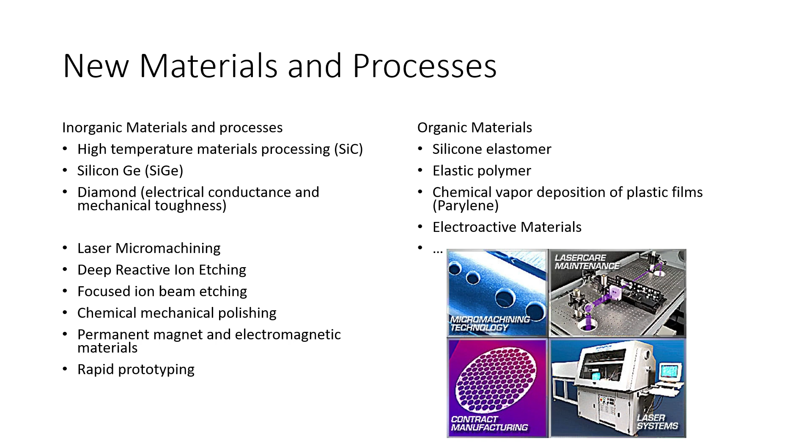We can use nanofabrication processes to make very fine nanostructures, very sharp tips, three-dimensional stacked lattices, or 3D stacked metallic structures.

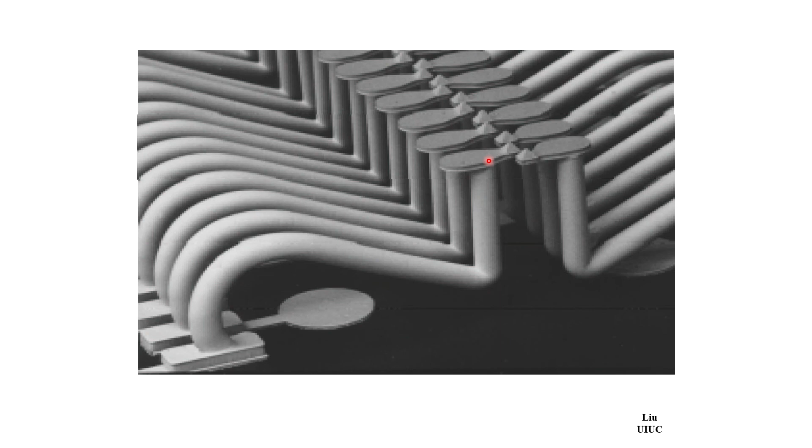A company called FormFactor invented a process using metal wires formed by wire bonding wires. And these have tips made by inverted molding out of bulk micromachined cavities. And this is later bonded to metal bonding pads to form these 3D arrays of springs that can be used to test the wafers after the fabrication, but before they're diced. So this is called the ATE probes, automatic testing equipment, ATE market.

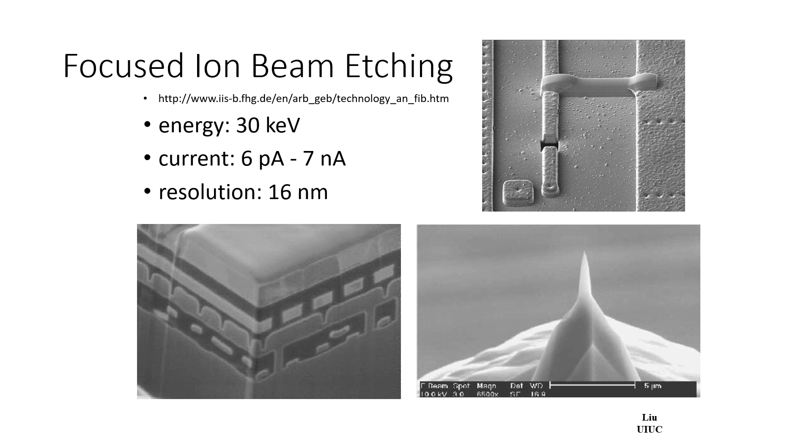Focus ion beam etching is another type of process where it's like ion beam formed in scanning electron microscope. You can use this to carve out cross-section structures or break structures such as metal wires, or use growths to form very sharp needles out of carbon conductive materials. The focus ion beam etching can be used to also etch sideways. For example, in this case, you can form capacitors that can measure the displacement of a proof mass that are suspended by two beams.

Now, one of the things that's very impressive about MEMS is that people keep on inventing new impossible processes that no one thought was possible. One such magic process is called DRIE, deep reactive ion etching. The invention of DRIE by Bosch made a name. People typically call it by the nickname Bosch process. This is credited to two engineers at Bosch in 1996. They invented a method where you can etch very deep structures with high aspect ratio.

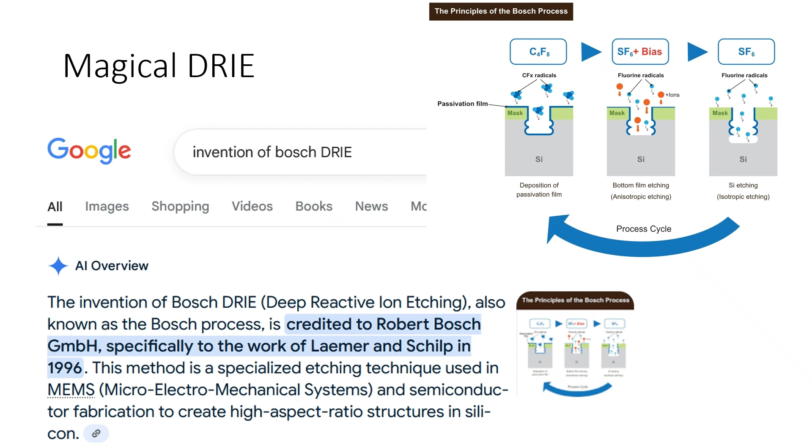The process involves etching, plasma etching, followed by plasma deposition, and followed by plasma etching again. The etching is preferential on surfaces that are facing the plasma. So using this step, you can form very deep structures in silicon. The etching speed can be very high. And without this process, people would not be able to make highly sculptured structures like this in silicon. This kind of structures is very critical for inertial sensors such as accelerometers, gyroscopes, and so on.

And one can combine such DRIE process. It's not just useful for MEMS, but it's also useful for IC. For example, you can use a DRIE process to etch trenches in silicon with very narrow defined geometries, grow thermal oxide, and then grow CVD oxide, use CMP to pattern the oxide and then remove the protective nitride. Now, how to etch the nitride away without attacking the oxide? That's not an easy process. I'm not going to discuss all the details here,

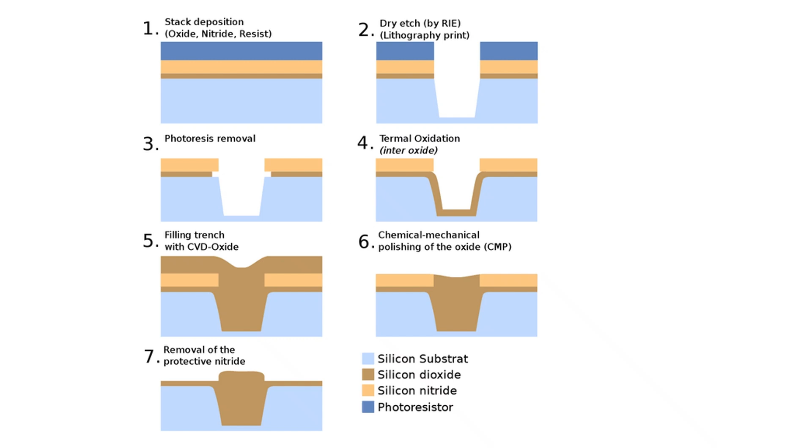but I hope that this illustrates the connection between MEMS and IC in the sense that a lot of tools that were originally developed for MEMS actually found much, much wider use in integrated circuits.

Another type of processing is called electroplating. In electroplating, you put a wafer with a mold, typically a masked resist layer, into a plating bath. There is a layer of seed metal, seed layer, that is connected to the electrodes. And for example, you can have a source counter electrode on the other side. And once the electric current is on, it will pull materials off this source and deposit it into the gaps in between the photoresist. And then you can remove the photoresist. The electroplating process is very useful.

A company called Novellus, which was later merged or acquired by Lam Research, developed a process where they can plate in very deep structures without forming mushrooms or voids. And this is another magical process. Without this, today's 3D packaging and all these CoWoS metal vias or interposers used in the chiplet packaging cannot be done.

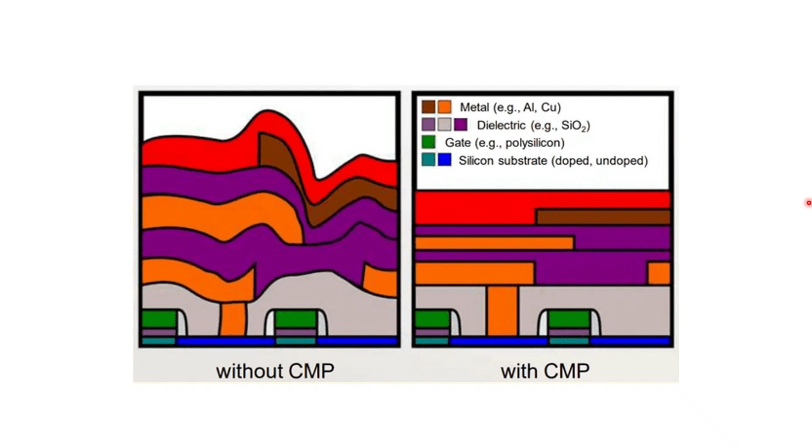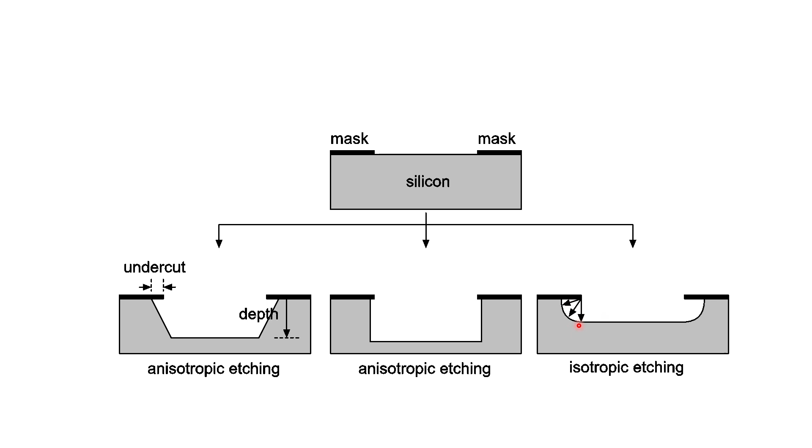Wet etching can happen in 3 different ways. If you have a silicon with a mask, you can have anisotropic etching where the etch rate in different crystal planes is different. You can have anisotropic etching that's vertical, or you can have isotropic etching where the etch rates in different orientations are the same.

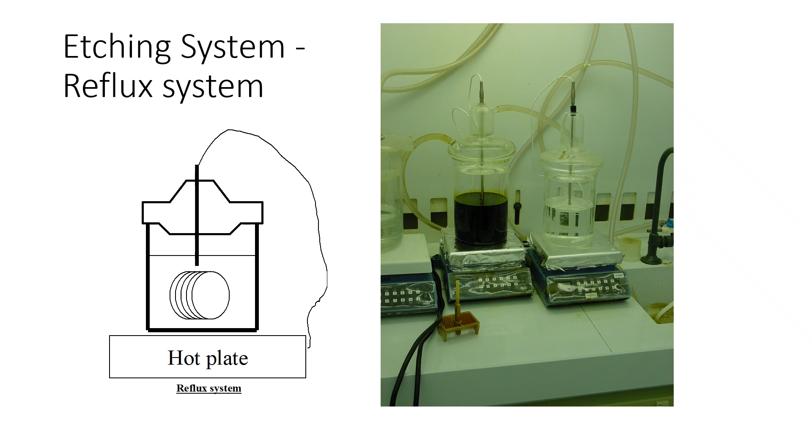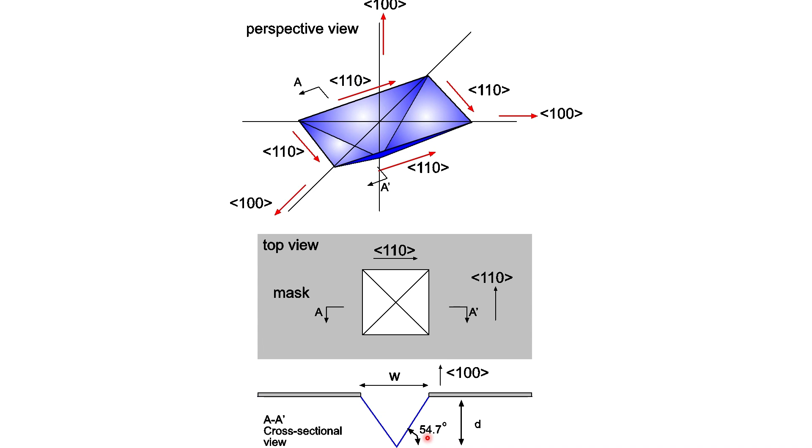Now, if you have a 3D structure like this, where the masks are aligned to 110, you are going to form an inverted cavity. The inverted cavity is bound by 4 111 planes. And if you look at the cross section, the slanting degree is 54.7 degrees. The idealized case, of course, is when the etch rate in 111 is exactly 0 or is completely negligible. Then you have 0 undercut. The etch rate is 0 at 111, and the cavity would be bound after forming the inverted pyramid. It will no longer grow any further.

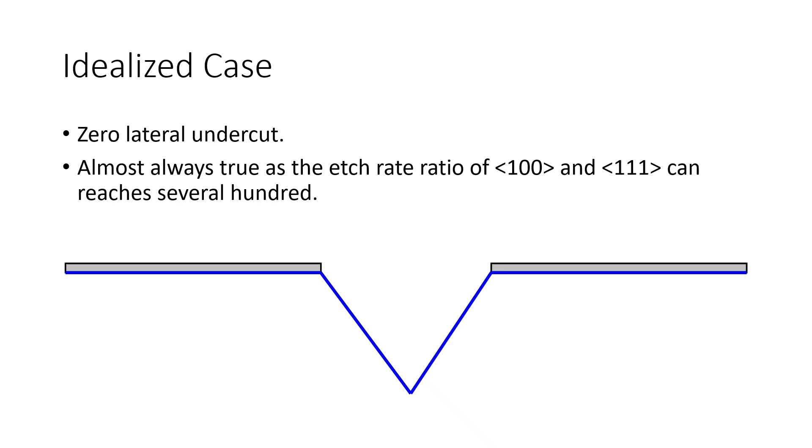That structure is what we call a self-limiting stable profile, SLSP. It's limiting by itself and it's stable. It doesn't matter how long you etch it. Ideally, this is good because in processing you can do over etching and it's not sensitive. You can have transitional profiles that are either unstable or stable. The unstable structures that are transitional change very rapidly. It's not a good situation if you want to have a high yield process.

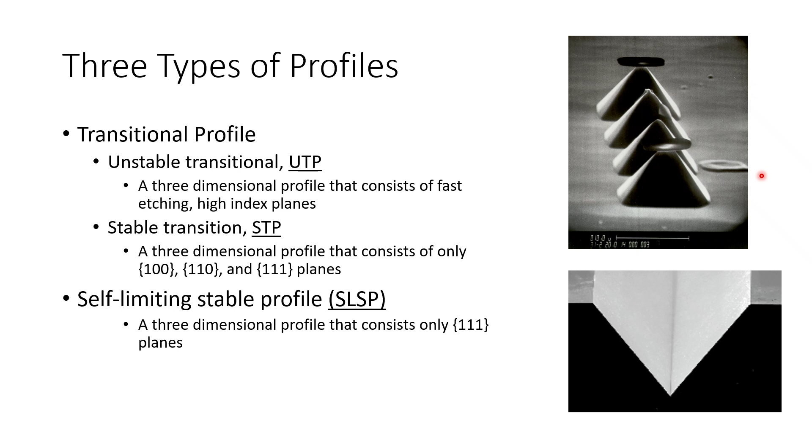Depending on the combination of the width of the window and the depth, you can have cavities that look like this, or you can leave a little bit of silicon at the back. You can have a full inverted pyramid. If the window is very small, then the size of the cavity would be very small as well.

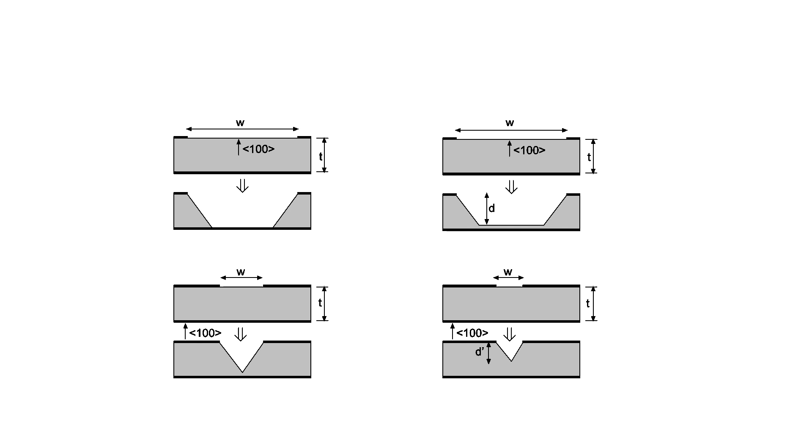Here's one example process where you can use this to make a pressure sensor. You have a silicon substrate, grow oxide on both sides. Use photoresist to pattern the oxide on one side. Oxide is a good resist to the KOH or EDP etching. And as long as the etching does not completely consume the oxide, you can form a deep enough cavity. Here you don't want to form an inverted pyramid, but you want this to be wide enough that you have a membrane. The membrane depth can be controlled in theory.

And after that, you can deposit, for example, polycrystalline silicon on the front side, or you might be able to use doping of a piezoresistor. In either case, this is good for making a pressure sensor. Now, however, this is not a very high yield or robust process. What do we mean by a robust process? A robust process is one that is not sensitive to over etch or timing error.

If you have a process where the result is very much determined by the timing, then you don't have a robust process. In this case, if the etch rate is fixed and you etch a little bit further, then the membrane thickness would change. And that would be not ideal for a pressure sensor device. So only use this as an example.

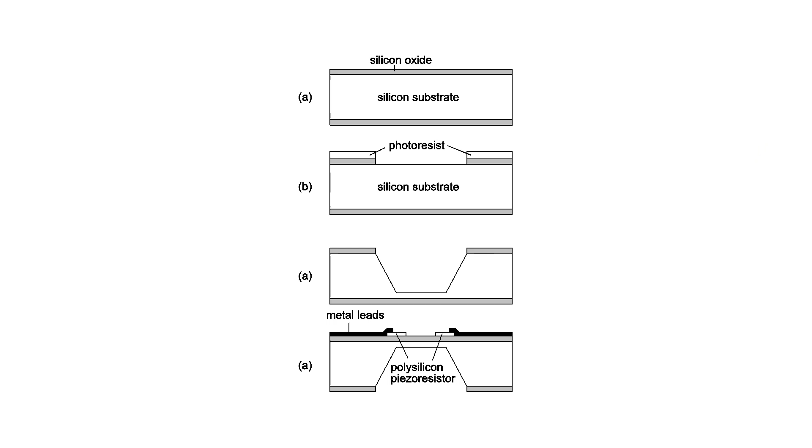Now, in reality, the etch rate in 111 is not completely zero. So what happens is if you have the mask and the edges oriented to 110, when you etch it a very short amount of time, then the 111 would be intercepting the mask. But as you keep going further, the 111 starts to have an undercut, and you can actually calculate the amount of the undercut by figuring out the etch rate in the 111 direction.

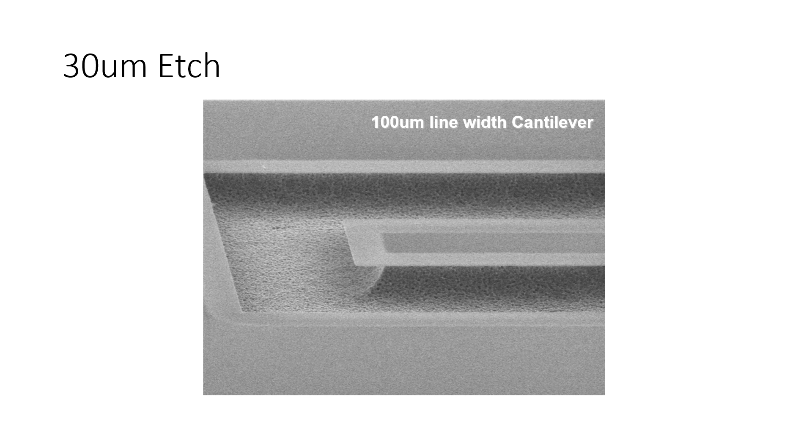The only thing that you have to be aware of is that you require a special etching chamber because bromine trifluoride and xenon difluoride, when they react with any moisture in the air, would form highly concentrated hydrofluoric acid. So it is very important to be safe. Here is a cantilever being etched by bromine trifluoride after 30 microns. And then this is after 60 microns of etch. The cantilever is free. You can see that the undercut is quite significant.